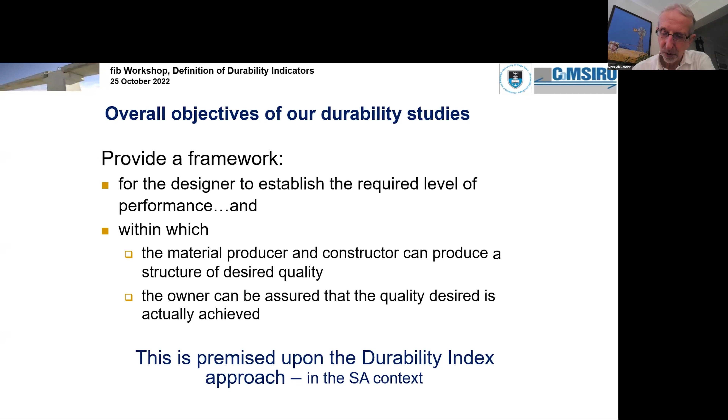This is what we call the durability index approach. The ultimate objective is very much what we see within standards development—a performance-based set of durability design and specification protocols. So it's premised upon performance-based design.

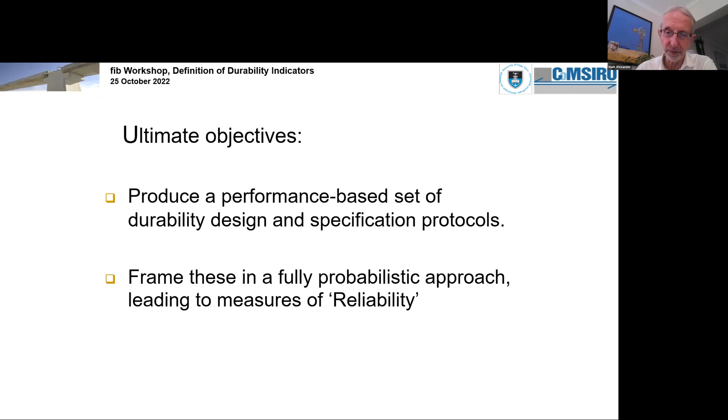In such an approach, one has to verify that performance, not simply on lab or model-type concretes, but on real structures, and then ultimately frame these in a fully probabilistic approach, which leads us to measures of reliability. This was the scheme we started off with a long time ago.

This approach can also be used for quality control. And if one can link in the environment, which is very important—durability is not something you can speak of in isolation from the environment—then you can also move to service life prediction.

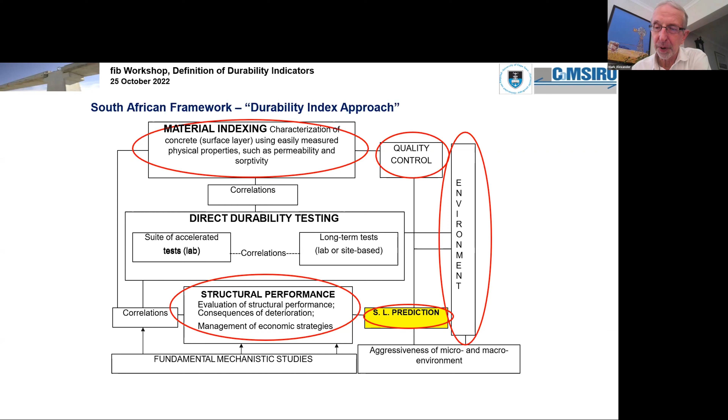By bringing all of these together in one common philosophical scheme, one can make progress along this path. These are the premises we've worked upon. First, if we're going to improve the durability of reinforced concrete structures, the durability indexes we speak of deal with that issue, and that largely comes down to reinforcing steel.

So we're not dealing here with durability indicators to do with, say, alkali silica reaction, soft water attack, sulfate attack, and so on. This is purely to do with steel corrosion issues, which comes down to the quality and quantity—or thickness—of the concrete cover.

We have to characterize those two aspects of the concrete very carefully. We will not improve our durability unless we can measure something relating to the quality of that cover layer. We must be able to measure it, and if we can measure it, we can control it.

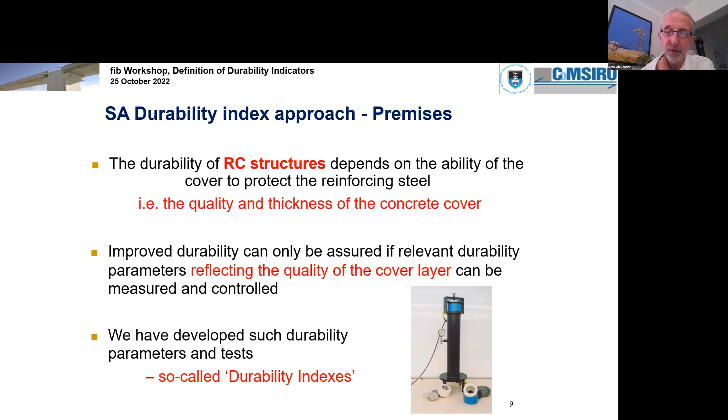Also, the cover quantity, or thickness, requires testing cover on every structure in a certain sampling scheme—that's the other side of it, which I won't deal with here. So we've developed tests to particularly reflect the quality of the cover layer, and we call them durability indexes or indicators.

A durability index is a quantifiable engineering parameter that characterizes concrete durability, or very broadly, quality. So we're measuring things at the engineering level, things that can be understood within an engineering context, bearing in mind that mostly we're dealing with structural engineers who want fairly simplified, although not non-rigorous, approaches that can be applied in a fairly simplified way.

These indexes must be sensitive to the important factors: the material factors, the processing, which means the mixing, placing, finishing and curing, that's processing parameters, and the environmental factors. So they should be sensitive to those things. For example, curing time would be one.

They should be based on the measurement of the transport properties. That's an important word. We have to characterize transport here, not simply mechanical properties, but physical and transport properties, to some extent chemical properties of the cover layer. And that should be able to be done in the lab or on in-situ concretes, so we have to be able to close that loop between the lab and the real structure.

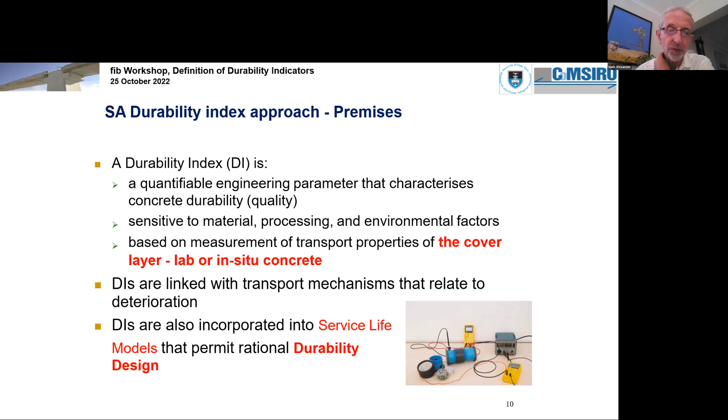As we mentioned, they're linked with transport mechanisms, and those transport mechanisms relate to the mode of deterioration. For example, if we're dealing with carbonation-induced corrosion, then we want to have a measure of gas transport. And then through service life models, we can move to durability design. So let me review briefly the tests and the service life models. There's a whole section on implementation, but I won't go into that this afternoon.

This is the OPI test, the Oxygen Permeability Index test, developed in the late 1990s. It's a very simple test, a falling head permeameter in which a specimen is clamped into a specimen chamber. One charges the cylinder with gas, oxygen in this case, measures the pressure decrement with time, and within not more than 6 hours you get a result related to the Darcy coefficient permeability. The specimen is preconditioned in a certain way, and the specimens are roughly 70 millimeters diameter, 30 millimeters thick.

The reason for that 30 millimeters is roughly to characterize the cover layer. Remember, it's the cover layer that is of concern to us here, not the bulk of the concrete. So this cover layer is very sensitive to all kinds of things, and we have to characterize that particularly thin section of the overall structure.

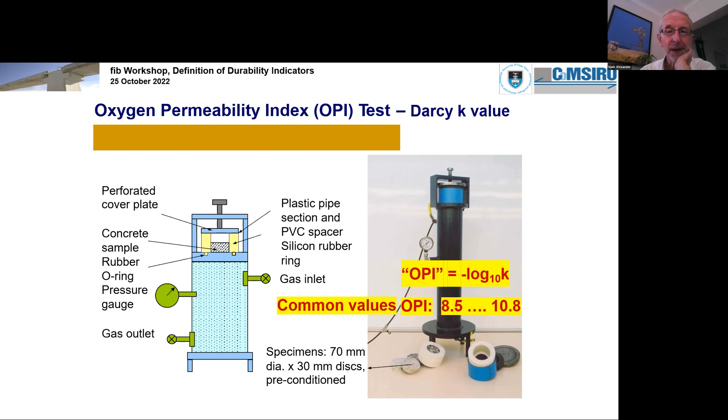So the OPI is defined as the negative log of the Darcy coefficient, just to make it into a more easily wieldable number. The common values would be between about 8.5 and say 10 or 11, which on a log scale gives you nearly 3 orders of magnitude, which you would expect.

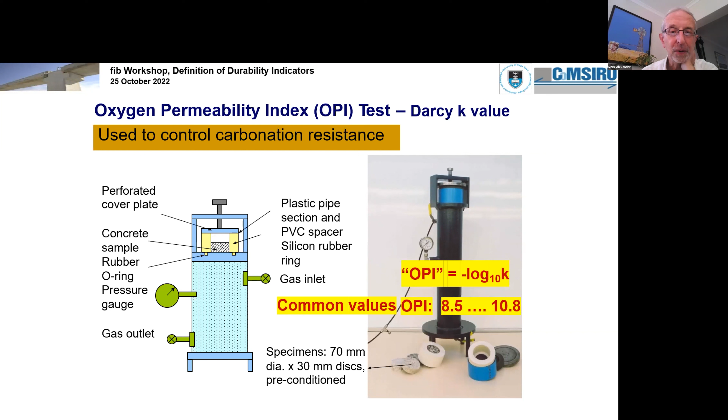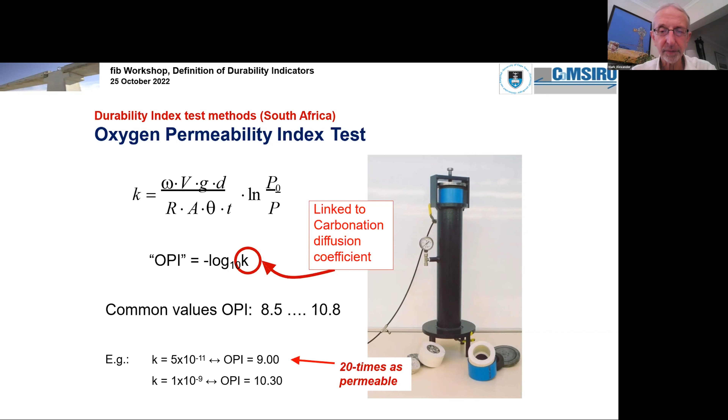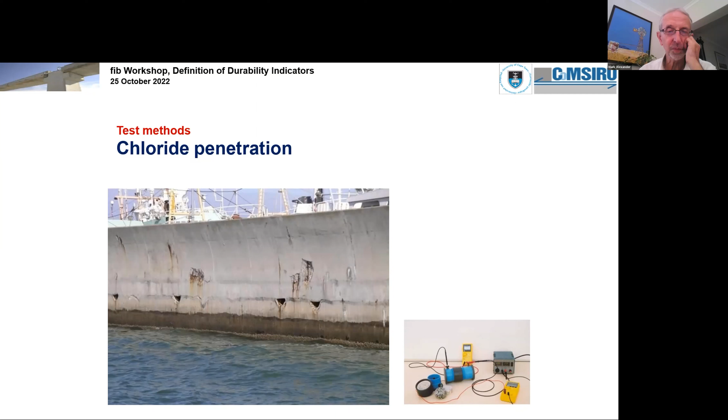Okay, so let's move on to the next one, which is the chloride issue. This is the other major reason for reinforcement corrosion, as we're all well aware. And in this case, 25 years ago, we developed this test called the Chloride Conductivity Index test, which is a South African standard.

It's really based on the chloride permeability test, the ASTM test. But what we did here was use a specimen in which we saturated the pore solution with a sodium chloride solution so as to eliminate the influence of the pore structure, as it were, and we were able to pick up the intrinsic characteristics of the material itself.

So this is a test. Again, you have to condition the specimen, but once the test is in the rig, it takes no longer than about 10 or 20 seconds to get a result. So it's a very rapid test, and the values come out in millisiemens per centimeter, typically between 0.5 and 2.5 millisiemens per centimeter, which represents quite a large range of chloride resistance of the concrete.

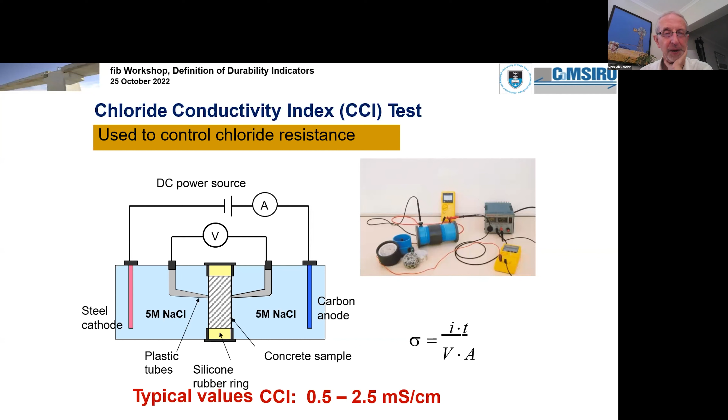And again, using the very well-known Fick's second law, the chloride conductivity is linked to the diffusion coefficient. And then knowing the surface concentration, we can work back to a chloride value and therefore a chloride profile. In that way, one can start to understand what's going on, and one can also use it to quality control by limiting that chloride conductivity index in the structure itself.

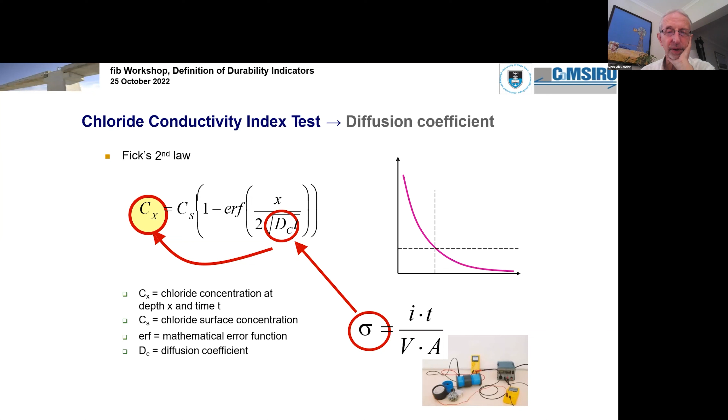And so that leads on to the models that have been developed. These are very simple models. More complex ones are being developed now, but really these simple models have worked extremely well for us over the period of time. They're initiation models at this stage. There's one for carbonation resistance, which uses the 28-day OPI as a parameter, and one for chloride resistance, which uses the 28-day chloride conductivity as input to a Fickian model. We have to make some modifications there for chloride binding by effectively aging the value.

But we could talk about that at a separate time if needed.

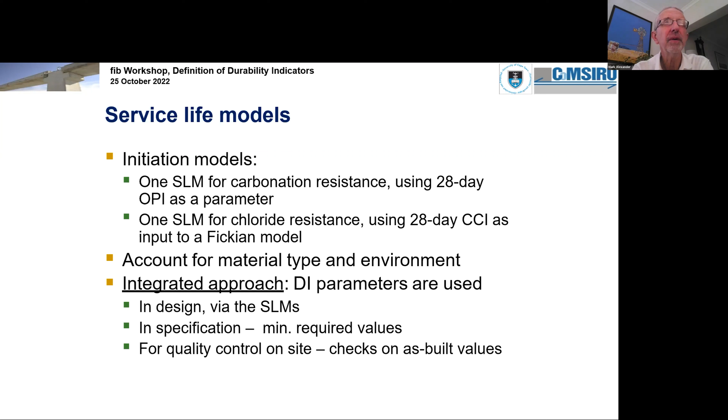These models account for material type and environment, and importantly, it's an integrated approach, a closed loop. We use it in design via the service life models, in specification where minimum required values are given with the number of defectives allowed, and then for quality control, checks on the as-built values. There are penalties built in for not meeting these values.

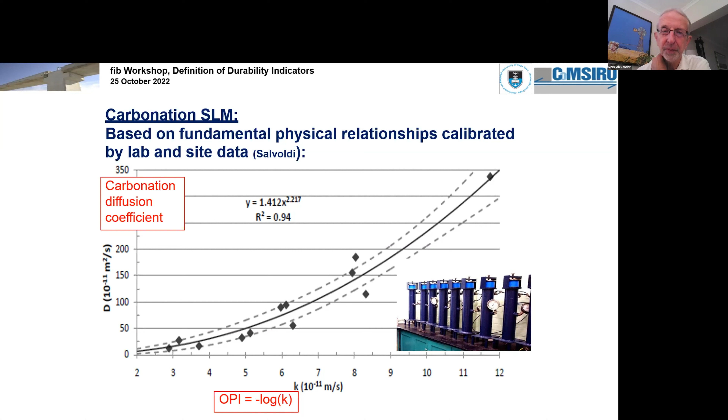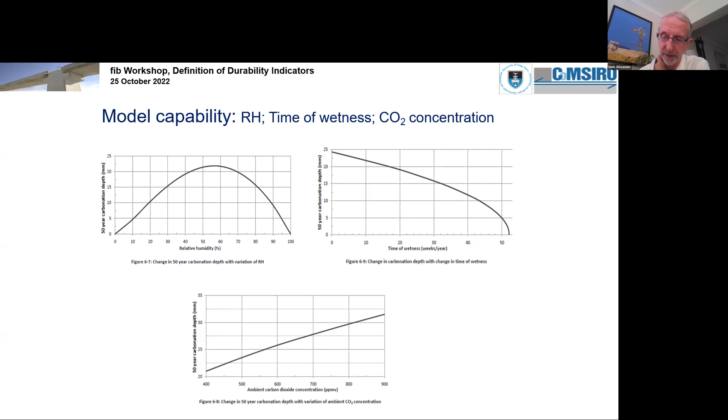It can handle things like different relative humidities, the time of wetness of the system, as well as the ambient environmental carbon dioxide concentration. As a matter of interest, we work closely with Roberto Torrent trying to compare our approach, which is based on little core specimens, with his direct in situ approach, and found very good correlations between the two.

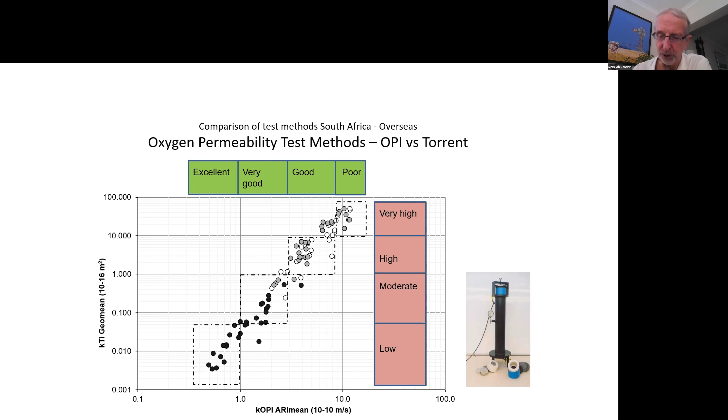So here we have the KOPI on the bottom axis, and on the vertical axis the KT value, with different classifications given in terms of the terminology used, but you can see the pretty good tie-up between those two. The intent here would be, in the end, maybe to move to the Torrent test for this type of problem. And if that showed the structure did not meet requirements, we could then resort to our approach, which involves removing a small core from the structure, taking it back to the lab and conditioning it to an absolutely uniform moisture condition, which the Torrent test doesn't allow you to do so easily.

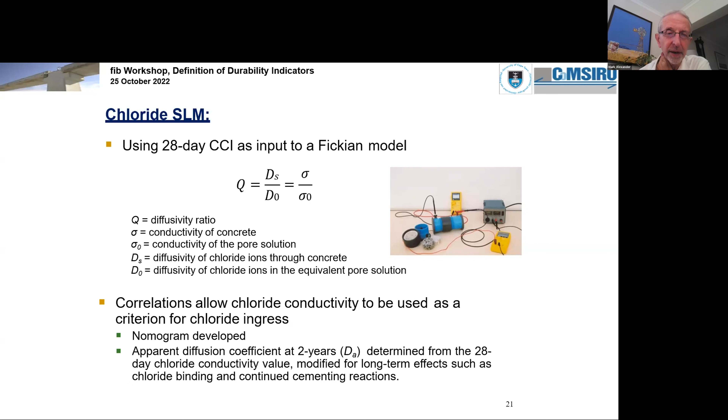The chloride service life model is based largely on the formation factor equation, the one you see there. In other words, if we can measure conductivities, we can infer diffusivities. And as I said, we need to allow for an aged effect because of binding. A nomogram has been developed where one can enter the chloride conductivity value, move through the binder type and environment, however you want to define that, and come up with a diffusion coefficient, which can then be applied in a service life model to check the diffusion on chloride profiles.

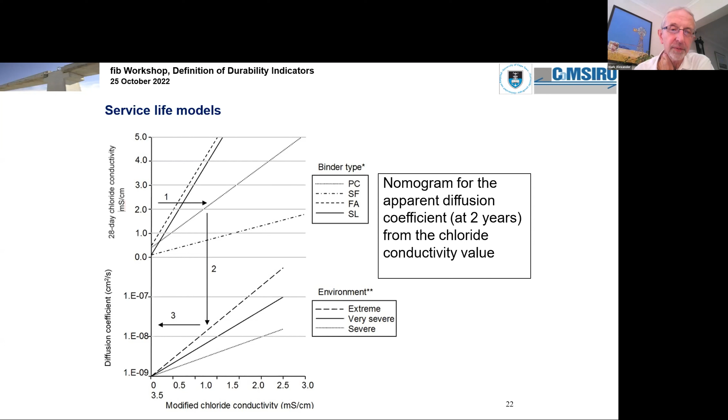So you can actually rationalize, you can also optimize between quality and quantity. It may cost you more to create a better quality concrete, but you can save on, let's say, the amount of cover you need. That would then give you an economic balance if you wanted to do that. So you can do both technical and economic optimization. That's how it sort of works.

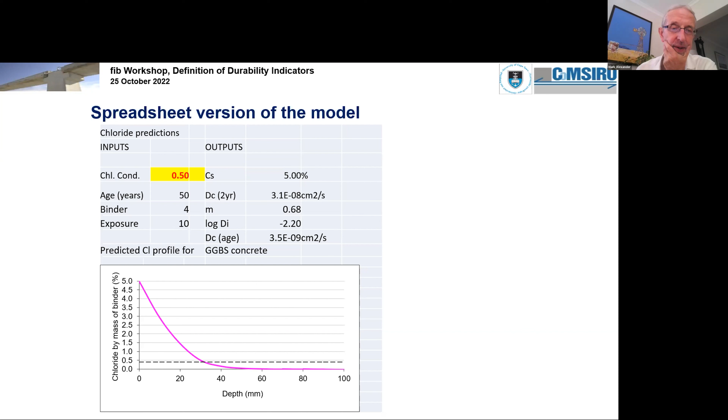I think to close off, let me go back to the requirements for establishing this performance criteria. It's very much like Roberto shared. We must have robust quality control tests. These have to be easily carried out, routinely done, reliable measures of resistance. We need service life models which should relate to that quality control test. We have to close that loop in order to have an integrated scheme.

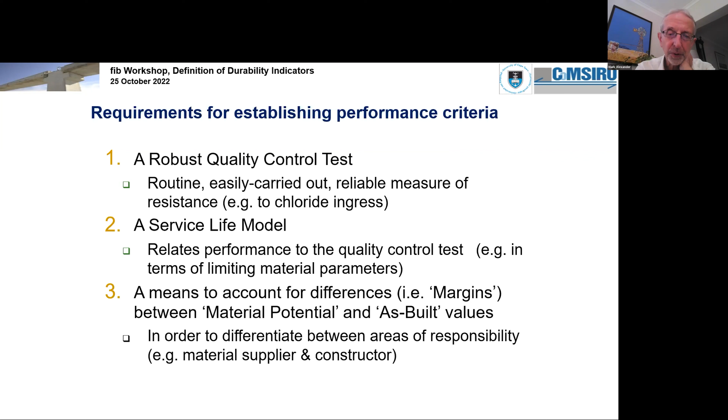We must be able to account for what we call margins or differences, because you get what we call a material potential, which is what might be produced by the ready mix producer. And the as-built values in the real structure are invariably lower or of lower quality generally than that material potential. So to differentiate between areas of responsibility, and hence also a question of payment items, those two have to be differentiated as well. Otherwise you're continually having conflicts between these issues.

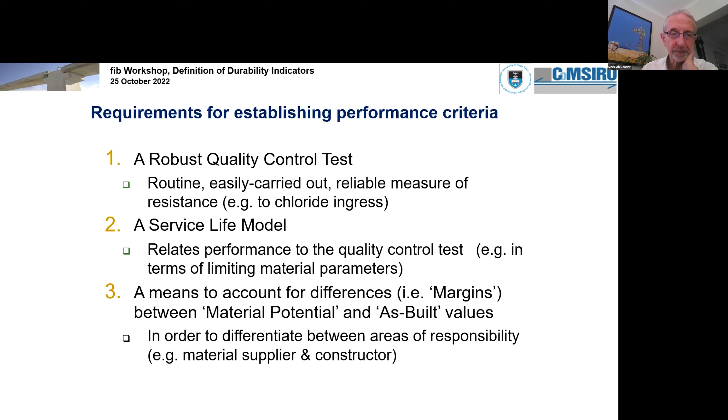I guess that's enough from me for the moment. So thank you for your attention this afternoon.